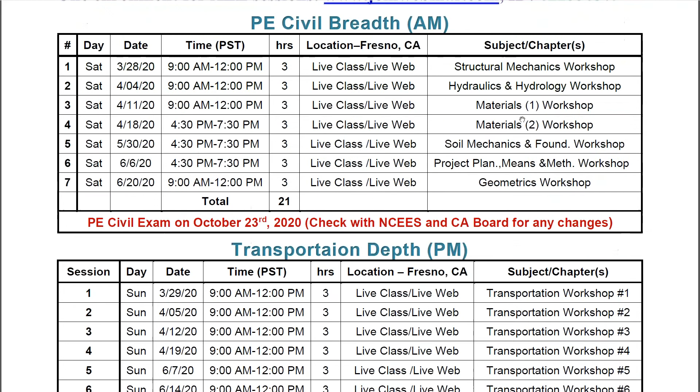Tomorrow I will be here for transportation from 9 to 12. This is also free, all of them with one ID. So one ID will be sufficient for all these sessions: the civil breadth, the transportation, and the construction.

We are going to start, or I will start teaching the courses in July. I hope the situation will be better in July and everybody stays healthy. On July 11, I will start the AM using my 3 books here, and NCEES might come up with a new book, I'm following up with that. We'll continue from where we stopped. As I mentioned, we stopped last time in chapter 7, materials, but I will go back one chapter, to geometrics, and so on, and the transportation and construction and all these things.

As far as seismic and surveying, I will start teaching. I'm teaching seismic, in fact tomorrow is the last session of the first quarter. By tomorrow I believe I have about 55 hours, or maybe even 60, because I added more sessions to catch up. I will start teaching the course again at the beginning of April, and the course will be the 55 hours. I calculated it to be about 50 hours, but I believe it's more than that. Somebody is working on putting everything on demand right now, but I will have 28 hours live, which is equivalent to a course by some other vendors, just to be a workshop, to go over problems.

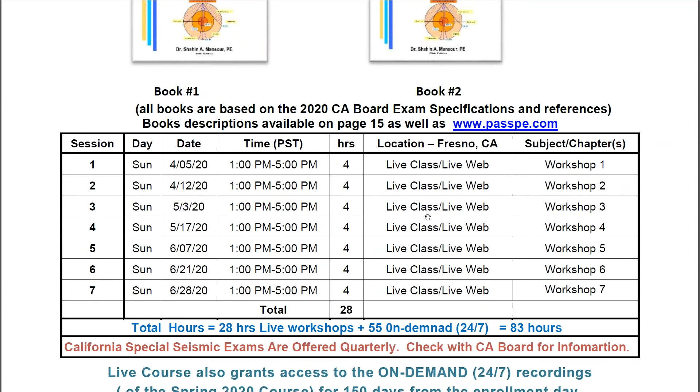I will use the 626 book. The other 2 books, the 300 and the seismic practice exams and solutions, are included here. The 626 seismic problems came from my textbook, which is based on the new code, the ASCE 7-16 and so on. This is for those who attended the first session, they will attend the second session for free, obviously, because the exams are postponed. Those who are going to join me for the first time will have access to the 55 hours. The moment you enroll, the books are in stock and we can ship it. All my books right now, I'm trying my best to have them in stock and ship the same day or next day.

Surveying also, I will be starting teaching the course on the 18th, which is April 18, a Saturday, which is in fact after the PE exam. The PE exam, as you know, used to be April 17, but it was canceled, as all of you know.

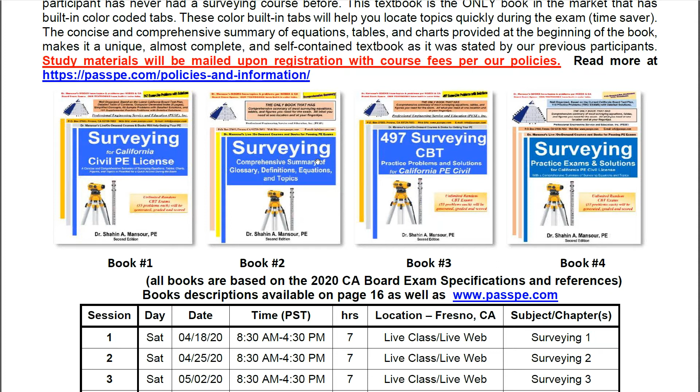So I am still working on the second edition. These books are the second edition, if I'm not mistaken, yes, the second edition here, and they have a brief description. For the second edition, I took the first edition, which I'm still using until now, the 4 books, and enhanced it and improved it and got rid of any typo or mistake if there was any. These books have been rated very high. All my books have been rated reasonably high, let me put it that way, or I'll leave it up to you, rated by the engineers who used them before on Amazon. If you go to Amazon, you will be able to see.

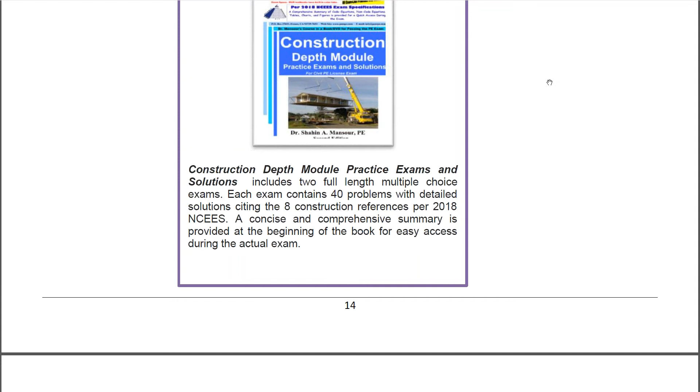Let's assume that for those scheduled to take the exam in the first quarter, you are going to take it in the second quarter, and be ready at any moment the situation allows for opening the sites again. Obviously we should be ready for it. This will be my advice. Assume that you are okay, if you're scheduled to take the exam in the first quarter.

Let us keep working hard, keep studying and going over all the questions or problems, anything you can do in order to make yourself ready, and in fact maybe make yourself not 100%, but 150% ready, so at least you can take the exam and get rid of it.

So the first quarter today is, I think, almost done. Tomorrow and after tomorrow is the first quarter, so what will happen to the second quarter? Will the Prometric site be available or not? I hope very soon, but be ready.

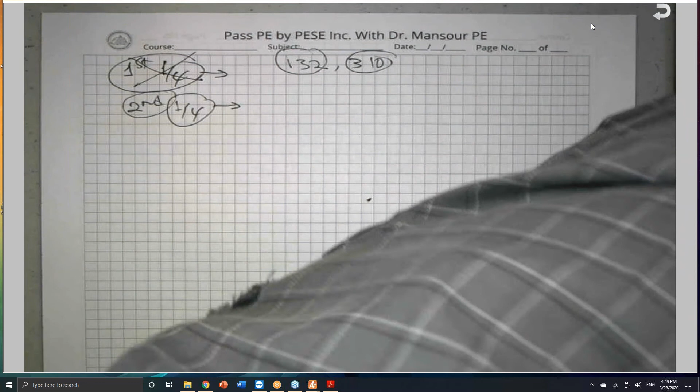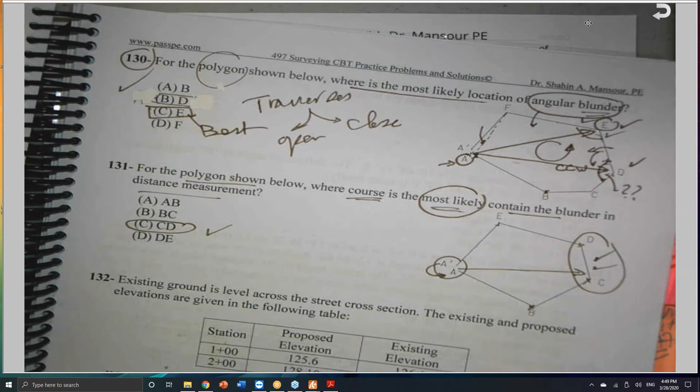Let's go to the two questions our friend asked, problem 132. Let's see problem 132 of the 497 book. Where is it? Here it is. At least if you don't have the book with you, this is problem 132. You can read it, and I will be glad to copy it, scan it, and send it to you if you don't have the book.

The existing ground is level across the street cross section. The existing and proposed elevations are given in the following table. What grading would be placed on the right curb stake for the top of curb at station 2 plus 00? This is the station here.

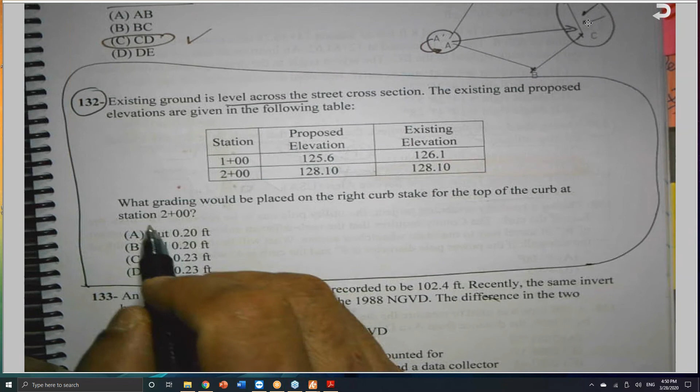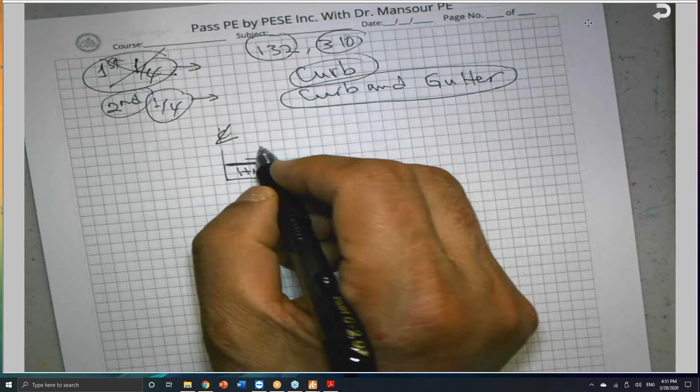As you know, a curb stake is concrete. We have curb by itself, and we have different types of curbs, and curb and gutter is another construction element. When you look at the center line of a street, we have the pavement, assuming this is AC pavement, asphalt concrete. The pavement has a cross slope of 2%. At the end here, we add either a curb by itself, which is a concrete element with a certain slope and height, and there are different types of curbs.

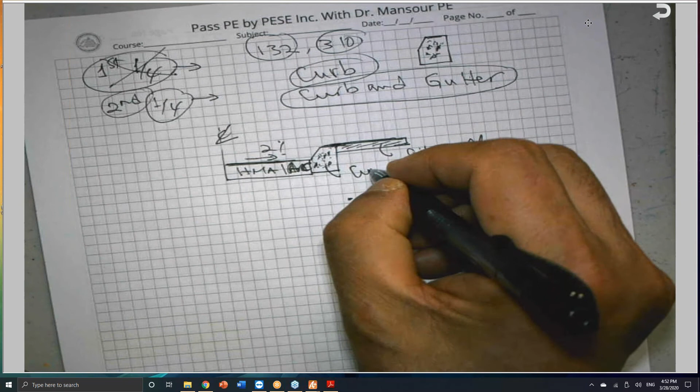So this is a concrete element here, a 6-inch curb, and the pavement. The curb is like this, I'm just exaggerating it. Here it is, and the sidewalk will be behind it. So this is a sidewalk, and this is a curb.

As I said, this is a concrete element. Normally it is cast in place at the job site. They put the forms and cast it in place. It has a certain slope, and the dimension here is about 6 inches. There are many types of curbs, and I know he will ask you about this.

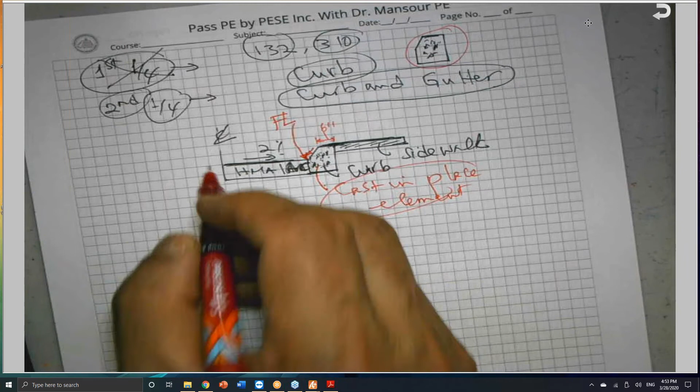This is the flow line, FL. As you know, the flow line is the lowest point where we need the water to run, across the flow line, following the profile of the road since the road extends that way. The water will run based on the grade of the road profile, which is a vertical curve, and it will be taken to a drainage inlet (DI) and stored somewhere in a basin. This is the surface runoff, SRO, called surface runoff.

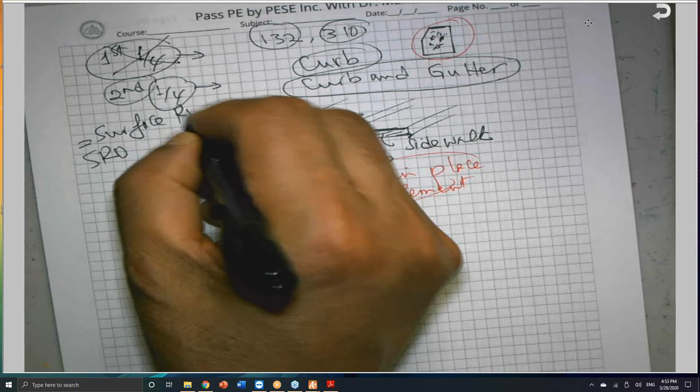Okay, this is the rain or storm, from any storm, and all of you went through the 8-hour exam, and we use this equation, Q equals CIA, the rational formula, to calculate the amount of water that will be accumulated, based on the area, the rain intensity, and C, which is a runoff coefficient, depending on the type of surface, and so on.

So the curb and gutter, this is a curb. The curb and gutter is also a concrete element, but cast in place. Let me try to draw it as accurate as I can. Or we can slope it all the way up to here. Let's make it this type, which is making more sense. The other type is very, very old.

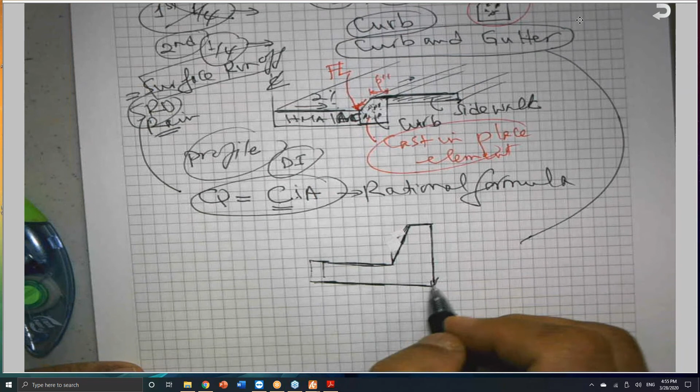So also it is sloped. Here it is, and also we put the sidewalk behind it. Sidewalk, normally concrete, and also this is about 6 inches, and this is a certain slope. And this is also the flow line, and this is also concrete, cast in place, and they probably saw it. They have some machine nowadays to do that, instead of putting the forms.

Okay, so this is also curb and gutter. This is the flow line, and this is called the lip of the gutter.

This term, by the way, in my textbook, chapter 12, which is on construction, there are some pictures or sections taken from Caltrans, the construction surveying book, or the surveying book construction section. Let me put it that way. There, here it is, it is the lip of the gutter, LIP, the lip of the gutter.

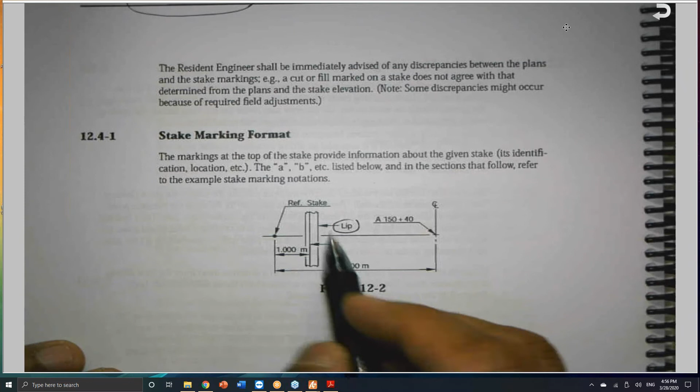So this is on page, by the way, 296. If you have my textbook, page 296. At least you know this is the top view. This is a top view, or elevation, as we call it, elevation. Top view.

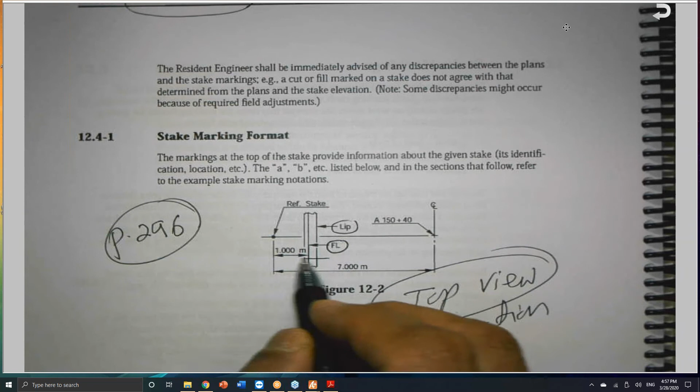So you see here it is, this is the FL, the flow line, and this is the lip of the gutter. And so if you look at the cross section here, if you'd like to draw a cross section for this, okay, like that, you will find exactly this is what I'm talking about. It is like this, and here it is, and this has some kind of slope. Okay, so this is the lip of the gutter, this is the lip, LIP, and this is the flow line, FL.

The flow line elevation. So basically, this is, if you look from the top, this is a side view, not top view. This is a side view from the side. So this is the lip of the gutter, and the pavement will come here, and the flow line and the sidewalk will be somewhere here.

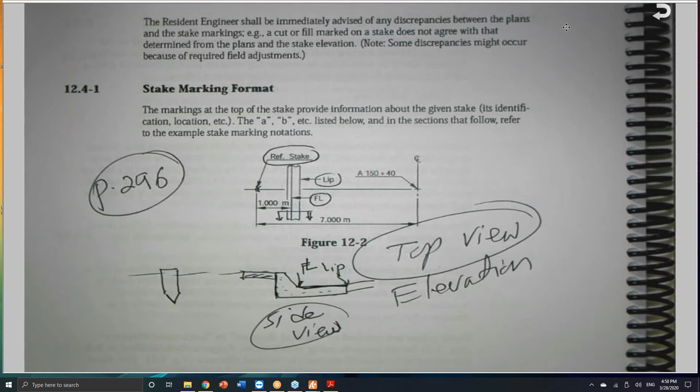So what they do, in order to construct this in the field, there is a stake, reference stake. This stake is behind, okay, we put the stake somewhere here. This is the OG, below, put the stake somewhere here. So a stake, as I mentioned before, it is a piece of wood. This stake here is the piece of wood that will be driven into the ground. And this stake is the reference stake. It's called reference stake.

And this reference stake will be used where you put the rod. I need you to understand the concept. This is why I'm going over this instead of just opening the book to the solution of the problem and that's it. No, because without understanding the problem correctly, it won't be okay. Understand the concept. So we need to be aware of that.

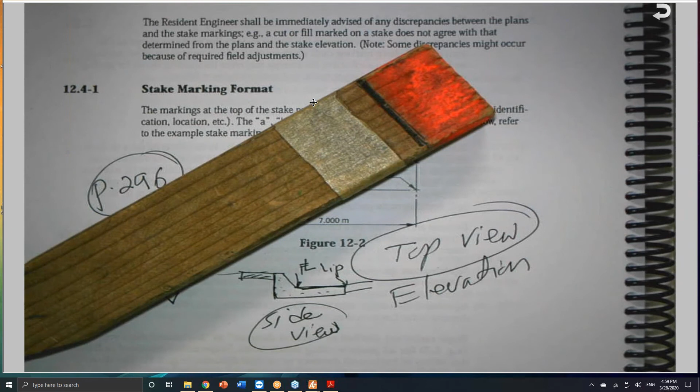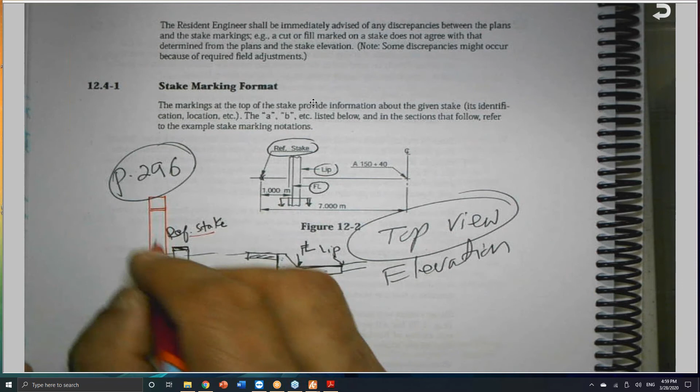So there is a stake somewhere here, and this stake we call the reference stake. Next to the reference stake, we are putting something called a witness stake, which is a long one, 4 feet. This is as you can see here, let me take the camera out here, and this is the driven stake. The stake will be driven into the ground, except we leave 1 inch on the top, and we'll color it or spray it. So when you put the rod, you put it on top of it, because I know the elevation of the top of this stake, and this is written here on the witness stake next to it. This witness stake is about 4 to 6 feet long, and we drive it next to the stake here.

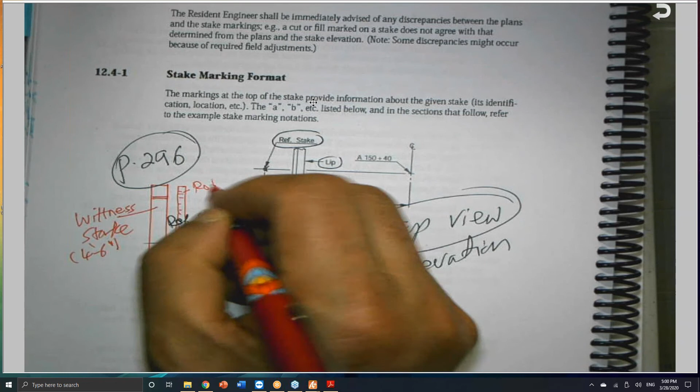I will come and put the surveying rod on top of it, the rod where all the elevations and distances are taken. This is the surveying rod. We can determine the location of the flow line, the location of the lip, the location of the end of the saddle. Any design parameter can be determined.

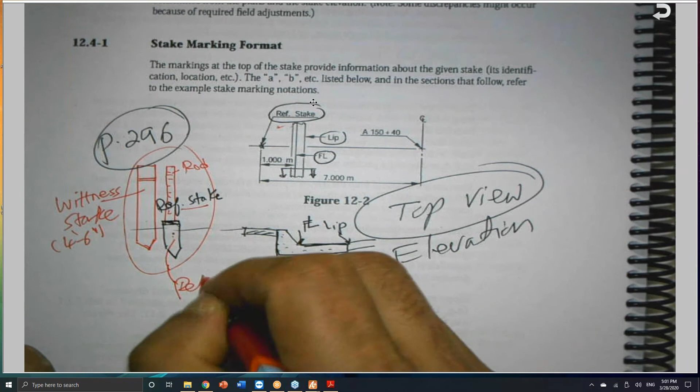What is written on the witness stake is in reference to the reference stake shown here. Normally we keep it about 2 or 3 feet away from the construction so nobody will damage it, and all the measurements will be taken from this reference stake, as we know from chapter 12, staking information.

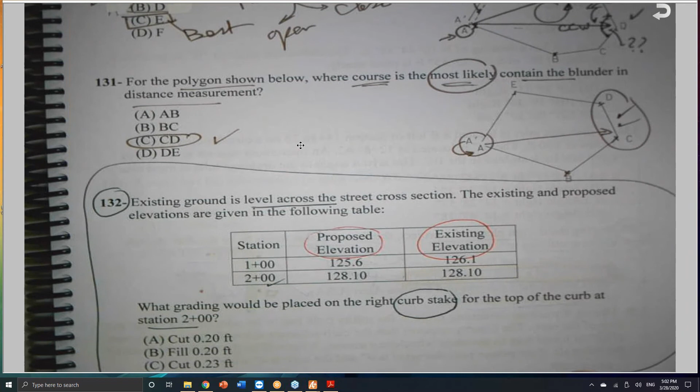So this is what is given in the problem, interesting information, and this introduction here, I hope explains what is given. The proposed elevation and the existing elevation, and the ground in the level cross section, straight. The proposed elevations are given in the following table, the curb stake and so on.

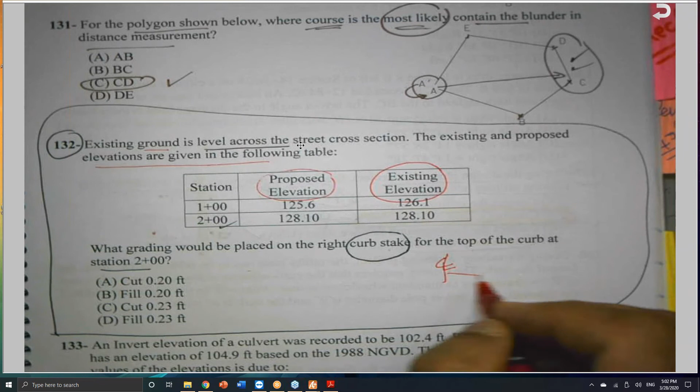There is a cross section. I believe it should be included with this problem, and probably this is what is missing, unless the text should add it here to explain what the cross section is. But if I remember correctly, this is why I draw the cross section. First, the cross section, the width of the road or the width of the lanes must be given. But let me answer one of you raising the hand, probably you have a question related to this.

What is the face of the curb? This is the face of the curb, where I draw it, here it is. This entire thing is called the face of the curb. But we normally take the flow line elevation as the controlling point. So the controlling point is, like this is a curb and gutter, this is called the face of the curb and gutter, but the flow line is the controlling one.

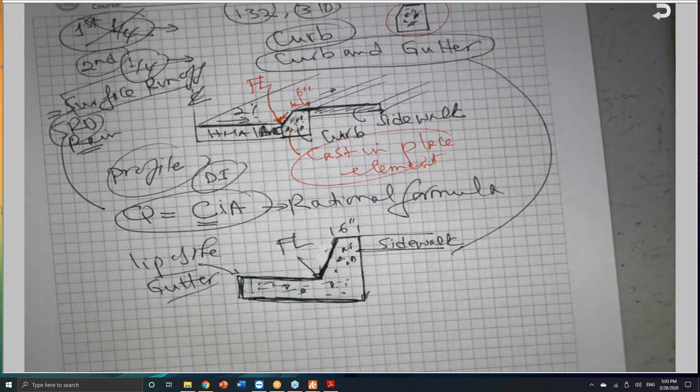So if you look at the problem, as I said, probably the cross section should be given because there is some information. Let me draw the cross section, if I remember correctly. The slope, the cross slope, normally the cross slope is 2%. However, in certain situations, we could have a different cross slope from that.

The curb here, whatever the curb size, this is the face of the curb. If you'd like to make it sloped like that or vertical, I have no problem, but for the calculation it does not make any difference. So this is a vertical curb, and this is a vertical curb, and the sidewalk will be coming after that. If you like to make it sloped like that, I have no problem.

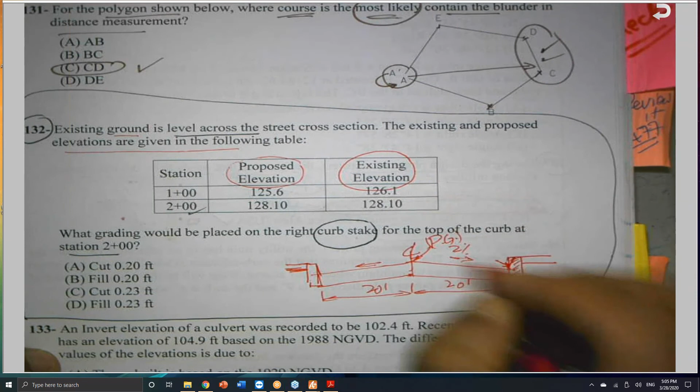I believe you are missing something here, because I look to my drawing. I have another drawing where this distance must be given to you, or the cross section, 20 feet width of the road, and this is the profile grade, the PG. Because I was reviewing this problem last week, in fact I was updating my books. I looked at this problem and said, I think we need to describe the cross section as part of the problem.

And I just opened another book. I found that this is the case. Yes, this is the case. So this 20 feet, and the cross slope normally 2%, but I believe in the problem it is given as 1%.

The proposed elevation is 128.1. This is the elevation here. No, the elevation is the elevation of the center line, sorry, which is a profile grade. So the elevation, the profile grade, the PG, this elevation must be given as 128.1, either given to you directly or given to you in a form of a vertical curve.

So this cross section has to go with it, 128. So 128, I can get the elevation here. So the elevation of the flow line, which is the face of the curb, so the elevation of the flow line, okay.

What grading would be placed at the right curb stake for the top of the curb at station 2? Okay, so right now I have 128.10. So it is here, and since this slope here is 1% at 20 feet, it is minus 20 feet times 1%.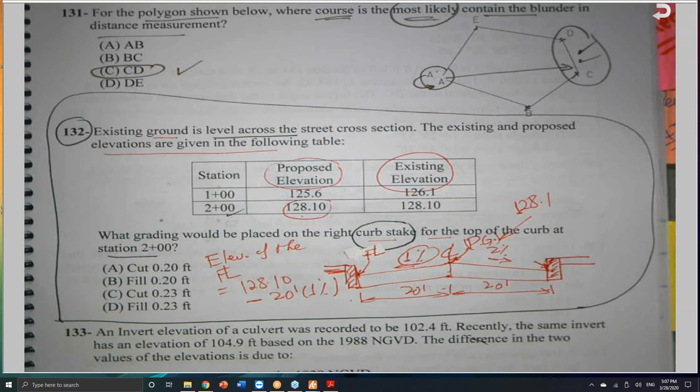As I told you, this cross slope must be given either 1% or 2%. For this specific problem, the cross section, so this elevation is 127.9 feet at this point here. So this is the elevation here. The existing elevation at this station is also 128.1.

This is lower than this. So right now, do I have cut or fill? Since this is my finished elevation, and this is the existing elevation, so the existing elevation of the OG is here. Sorry, it's 128.10, and I know they are the same.

This is why I said, wait a second. The finished elevation is here at the face of the curb. The finished elevation, which is at the flow line, this elevation is 127.9 feet. So I am below the original ground. That means that I have cut.

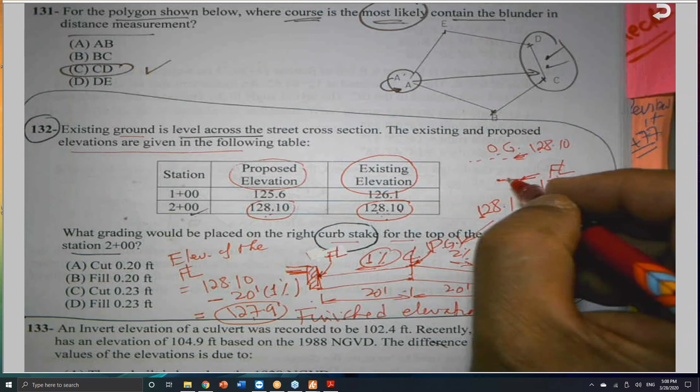Because as you know, when we have the OG, the original ground, this OG here, normally we request this by sending a survey request, and somebody will go and survey the original ground, which we call the terrain, or we call it DTM, Digital Terrain Model, which is basically the elevations of the existing ground. Our profile will determine if we are in cut or fill.

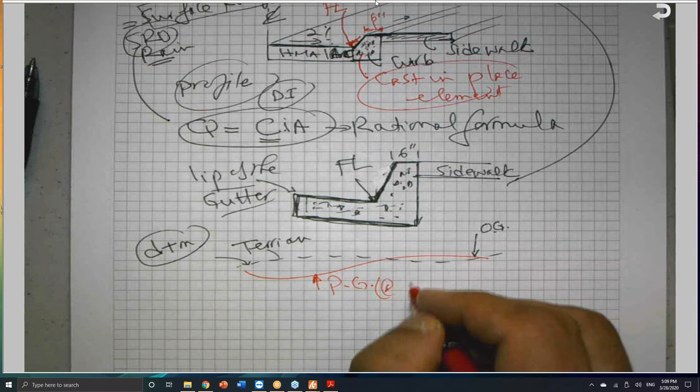So if this is my profile grade here, this is a profile grade which is PG. This is for the center line, and this is applicable to any situation. Normally the PG is at the center line, the profile grade. For any given street or road, we prefer the center line to be the profile grade, but sometimes we have a separate two profile grades. We have some roads with two separate ones, one higher than the other, so each one has its own profile grade.

So in this case, since we are OG above this one here, we have cut, and here we have fill. This is the rule, as all of you know: if we are higher than the OG, we are in fill; if we are below, we are in cut.

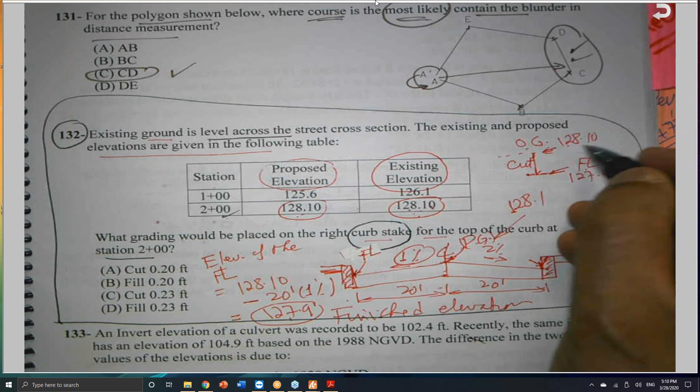Going back to this problem, you will find that the OG is 128.1, and the finished grade, or the face of the curb, or the flow line elevation, gives a difference - this is a cut. If we take the difference between 128.1 minus 127.9 feet, this gives you 0.2, two tenths of a foot of cut, and this is supposed to be the answer. Here we have repeated answers, 0.2 cut and 0.2 fill.

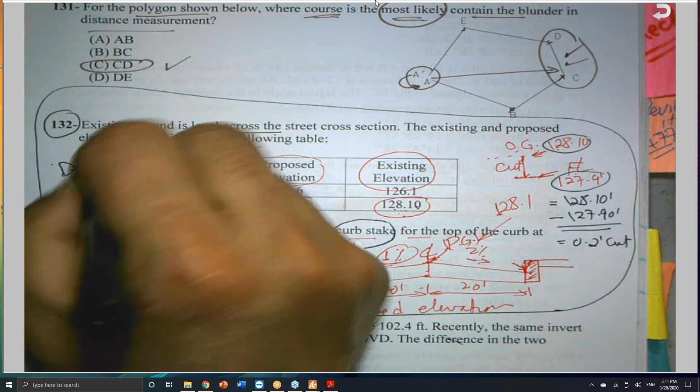So in this case, probably this is what throws you off, that the cross section or the description of the problem - we could describe this, as I told you. So describe the problem as far as the cross section, because it's missing. To be fair, the problem should describe the problem, or give a cross section. Because after I read it, I went to another book because I have a similar problem, and I found that the cross section must be given to you.

So this is what I will add or modify as far as describing the cross section: it's a 20 foot cross section, or 40 foot road width. We normally assume the center line in the middle, so 20 feet at a cross slope of 1% or 2%, and the problem could specify the station, so specifically at station 2.

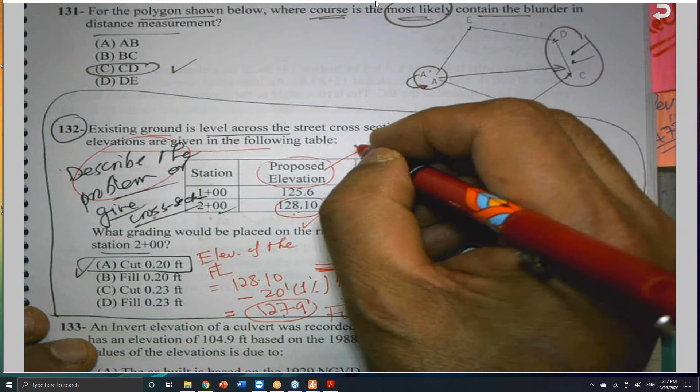So this is what we are comparing, the existing with the proposed, or the proposed elevation with the existing. Normally the proposed elevation is at the center line, because that is the profile grade where all the elevations will be measured with respect to that.

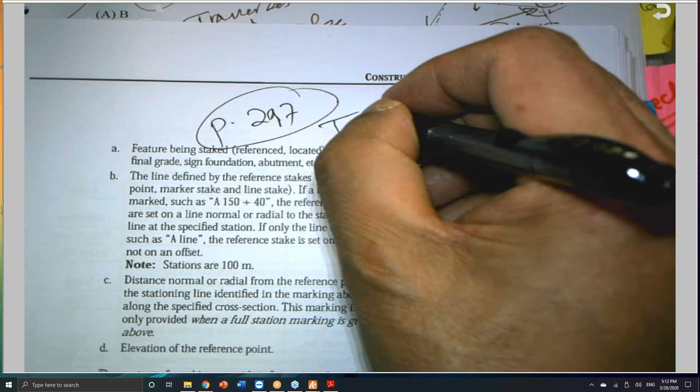Okay, so this is something that will probably throw you off a little bit. But if you look at the construction book, construction chapter 12, you will find something similar to this. This is a stake. If you flip the page, you will find on page 297 of my textbook an explanation of the stake cut, flow line, the lip of the curb, and so on. So it gives you insight about how to translate any given statement into some kind of drawing or illustration. So this is one thing.

Okay, so this is 132. So I wrote a note here to myself. Let me put a tab here. At least I can.

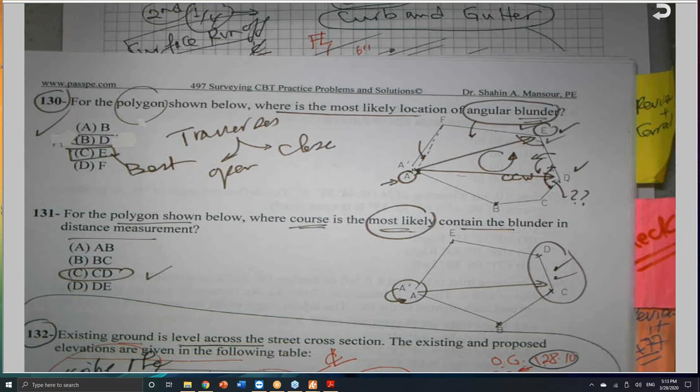Okay, the second problem you are requesting is 310. Let us see 310. I hope 310 is not missing anything. 310. Okay, here it is, 310.

So 310 is, again, this is a cross section at station 12 plus 00. And the cross section here, this is OG, original ground. Normally OG here it is shaded, so probably OG normally it is shown as a dotted line or a dashed line. It would be a good idea, but since it is shown as shaded, sometimes we use this. And it is asking what is the area of the fill.

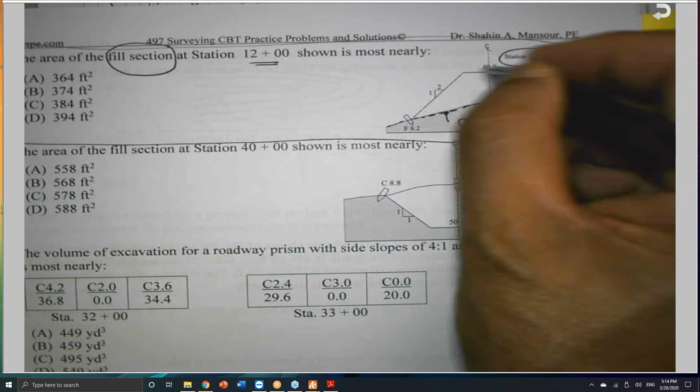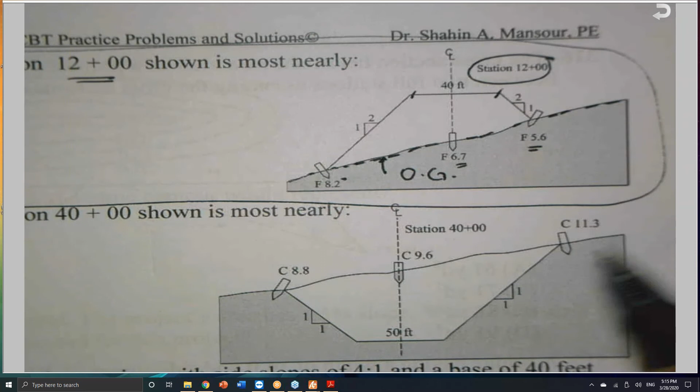So the proposed cross section is like this. It is 40 feet wide, and this is the center line. And we have some stake information. Let me zoom in so you can look at the cross section much better. Okay, so this is a road, it's 40 feet wide, and we have 2 to 1, 2 horizontal 1 vertical, 2 horizontal 1 vertical, and this is the OG. So for sure we do have a fill.

And he is asking what is the area of the fill area. The area of the fill is needed in order to calculate the volume, because if we do have a road like this, this is in a fill. So in this case, we need to get the area here, if this is the OG like that, and I am building a facility like this. So I have a fill area here.

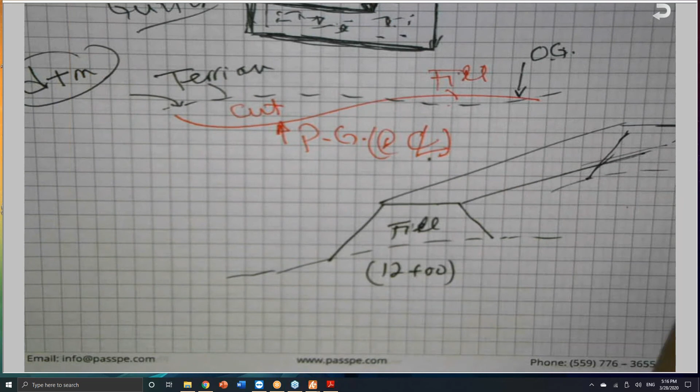This is station 12 plus 00. And probably at another station, okay, somewhere here, so this probably station 13 plus 00, a 100-foot station here. So the cross section here and the cross section here, A1, for example, and A2...

...will help me, or will enable me, to do the volume computation using the average end area method. As all of you know, volume using the average end area is basically A1 plus A2 divided by 2 times L, and we divide by 27 to convert it to cubic yards. But the basic equation is A1 plus A2 divided by 2 times L. This is the basic equation that we use for the average end area method to get the volume.

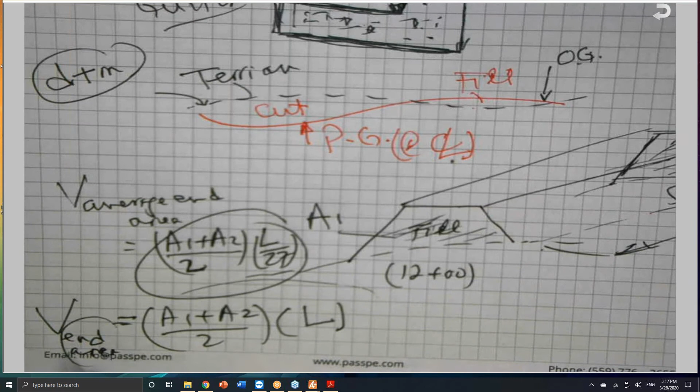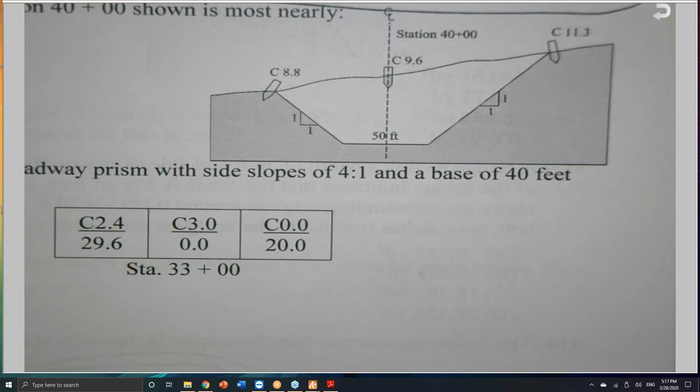So the first step in volume computations is to find the areas. And this is what, as a first step, is to calculate the area of the fill. Immediately the following problem is the area of cut. In fact, this is a cut, indicated by the letter C. Here the letter F is indicating that. So again this is the OG.

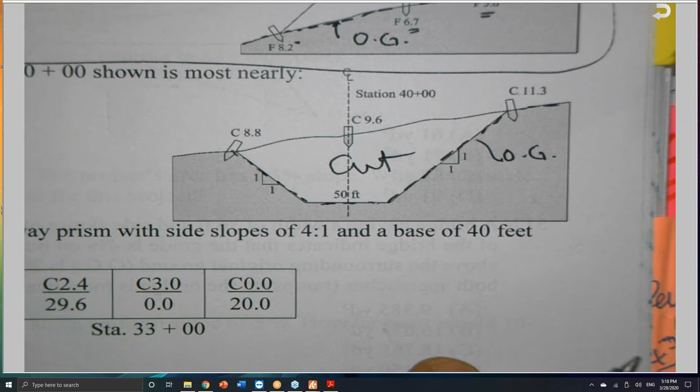Again, normally the OG is a dotted line, or since we are showing it as a shaded area, it is acceptable to do that. So they are giving you the cut, how much cut with respect to the profile grade. This is the profile grade, by the way, PG, a profile grade, which is normally at the center line of the road. Like this one here, also the profile grade is somewhere here, PG.

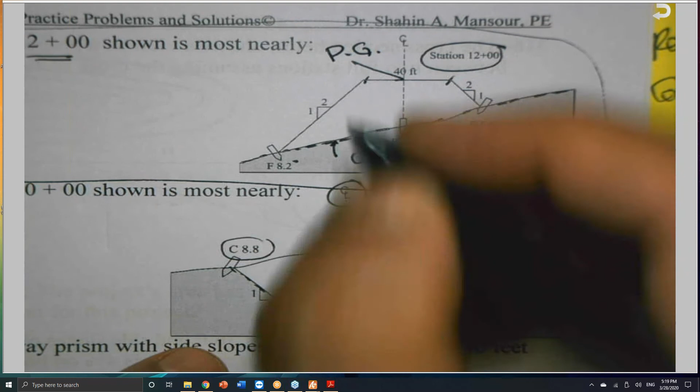So to calculate the area, either in case of a fill section like this or a cut area like this, we need to remember the area computation - let me just bring you up to speed here. So the area calculations, there are more than one way to do it, to calculate the area. Number one, which I normally recommend, is to look at how this area can be broken down into simple shapes or divided into simple shapes. This will be my first choice.

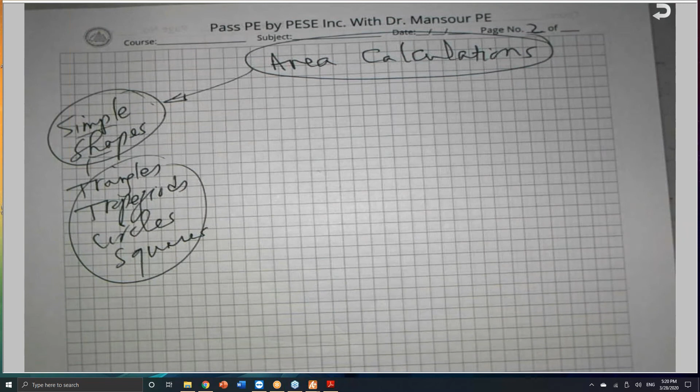Like the problem we are going to solve here, I will break it into simple shapes: triangles, trapezoids, circles, squares, whatever shapes you can generate. This is almost my preference, and I always recommend that first.

Some problems give you the shape or the area you are required to calculate, and he's giving you coordinates. So we use coordinates.

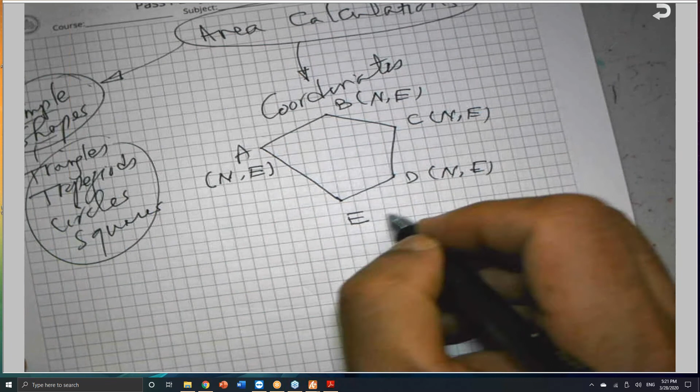He gave you a parcel like this: A, B, C, D, E. But he gave you the coordinates, the northern and the eastern, or X and Y, at each corner. The moment I see coordinates given at each corner of this parcel, and he's asking what is the area, that means he is asking you to calculate the area using coordinates, as I discussed in chapter 8 of my textbook. It's a very powerful method, by the way.

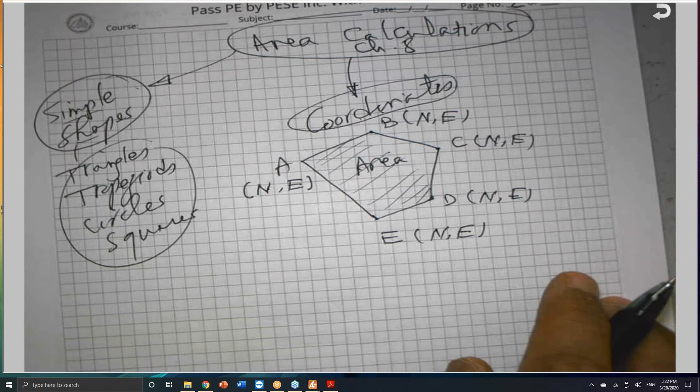But we need to remember that using coordinates will give you twice the area. Double the area. You have to divide by 2, because among the answers, I'm expecting that he will give you an answer that matches twice the area. I can come up with some kind of problem right now, or go over some problems given in my book.

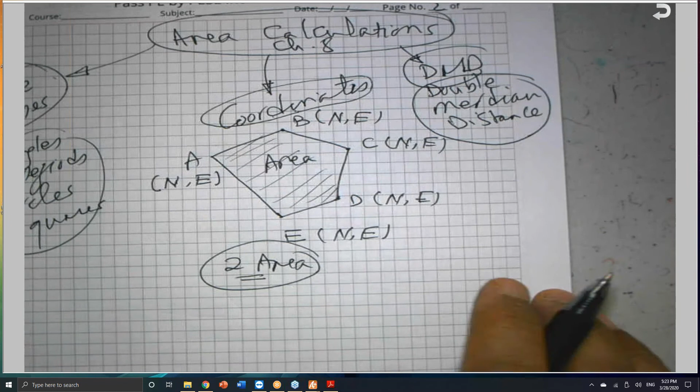There is another method also discussed in chapter 8, called DMD, double meridian distance method. It is very lengthy because you have to get the DMD first, and after that multiply it by the latitude. It's a very lengthy process, and this also gives you twice the area, but he might give you something already calculated - the double meridian distances in a table form and ask what is the area. But to generate everything from scratch will take more than 3 minutes.

But with coordinates, you should expect something like this in the exam, where a shape can be given like this.

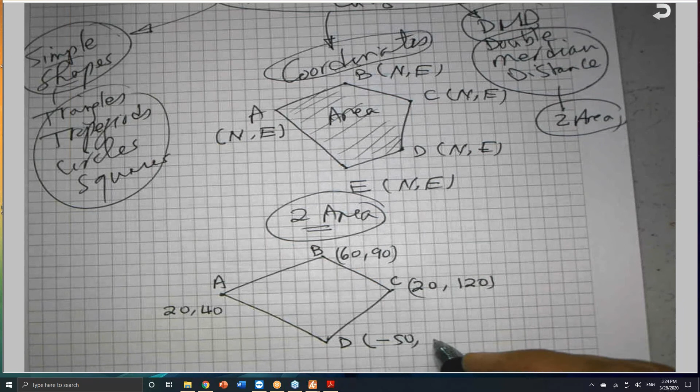For example, if this is A, it is 20 and 40. This is 60 and 90, assuming that, and this is 20 and 120, and let's assume this is negative 50 and 85. Let's assume this is given to you - I made the problem based on my own example, with coordinates, northern and eastern, given for each corner, and here I put one minus specifically. What is the area of this parcel, or this shape, or parcel of land?

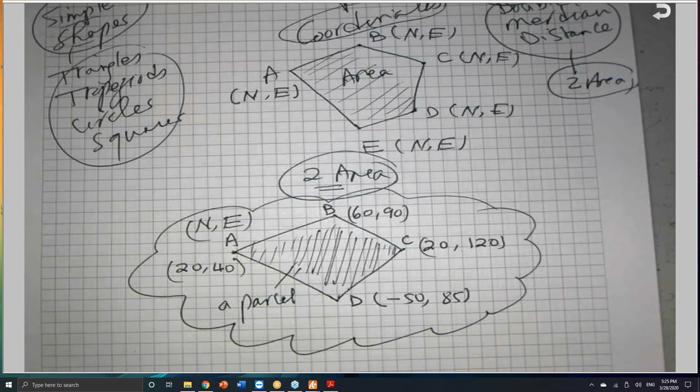As you recall, using coordinates, the way we do it is we put these coordinates horizontally or vertically. Coordinates, by the way, have another name - it's called the crisscross method.

So if you look at this, you will find that I need to put the coordinates. I start with A, and as long as you start with the same order, northern, eastern, there's no problem. So it is 20, 40. The second one is 60, 90. These are the northern coordinates, and this is the eastern coordinates. And 20, 120, minus 50, 85. If you have coordinates with a negative sign, you have to enter it with the negative sign.

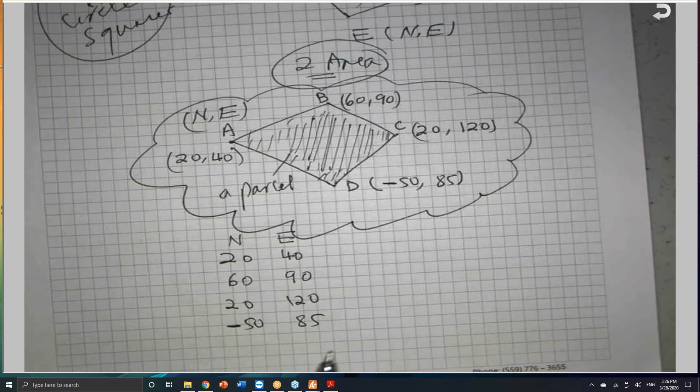It's something that happened before, and it was very confusing to some engineers, because as we are going to see in the process of computing the area using coordinates, we have a plus side and a minus side. But you enter the coordinates as given.

One requirement for the coordinates method, or the crisscross method, is to repeat the first coordinate. So I start with 20, 40, and I list all four corners, and I have to end it with 20, 40. This must be repeated - this is a requirement for the coordinates method, repeating the coordinates of the first point. You have to do that; if you didn't, you'll get an error. After that, we do the following.

You multiply this times this, and this times this, and this times this, and this times this. As you can see here, we have 4 sides - 1, 2, 3, 4 - so you have 4 multiplications, and we'll consider this a plus.

And I will do it in front of you right now. You are going to take the opposite direction, which is a minus. This is 20 here, just to make sure. This is the minus side, and it does not make any difference which one is plus, which one is minus. It's not a big deal, because we take the absolute value of the area at the end, since the area cannot be negative.

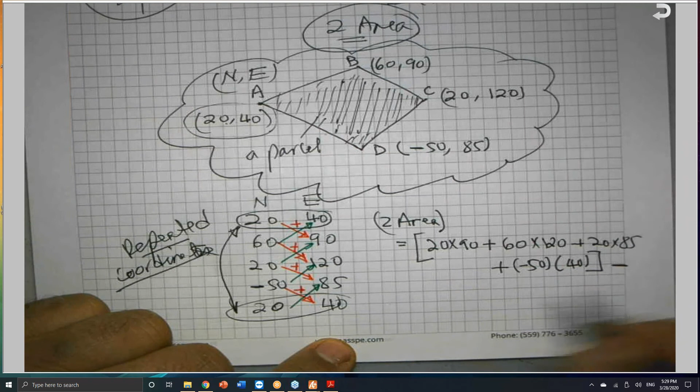All these are pluses, but because I have one coordinate that is negative, I put it as is. I will subtract this, minus the green. So those are the red multiplications. I should use the red. Minus the green multiplications.

Don't forget this minus here. Minus 20 times 85, minus 50 times 120 - sorry, a plus, because I put the minus here, I factor the minus outside, so minus all these. And 20 times 90, and finally a plus 60 times 40.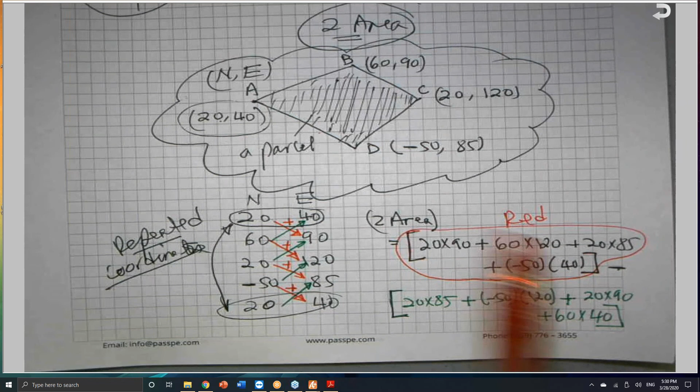So this is the way we do it. I will collect all the terms in the red, and I collect all the terms in the green, and take the difference between them. This will give me twice the area. The area is equal to 1/2 of that.

So if you allow me to do this very quick, you can help me by doing this with me, please. 20 times 90, plus 60 times 120, plus 20 times 85, plus minus 50 times 40. I got here all the red areas, 8700.

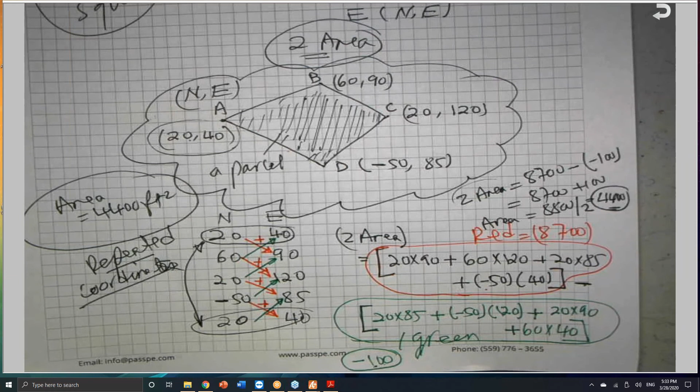The reason I'm doing this problem is because I'm going back to the original question that was asked by our friend Larry, asking what is this here - the area here.

Let me just draw it very quick, at least when you receive my notes it will make more sense. I'll make a copy of this page also to send to you for those of you who do not have the book. So this is the OG, and here is the center line.

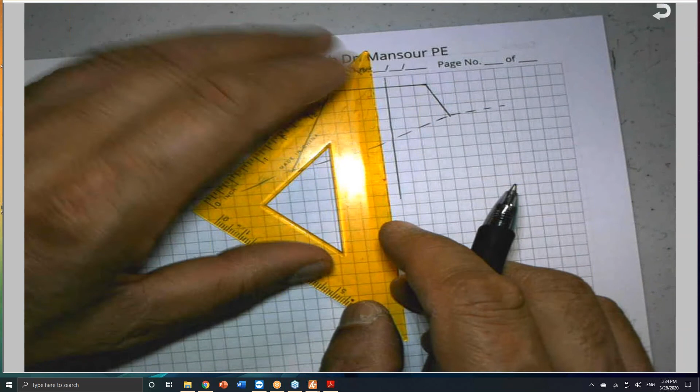And I have a road, and I have a fill, and I have a fill at such slopes. Oops, I didn't put my center line in the center. Let me move it a little bit - at least it will make more sense to you. Sorry, I didn't.

Okay, should be in the middle here. It seems that. Okay.

So this is the center line, and we call this the profile grade, PG. He said that this is 40 feet, that means 20 feet here and 20 feet here. Normally the center line is in the middle, okay? And this, we call it HP, hinge point. And this is also, we call it HP, hinge point.

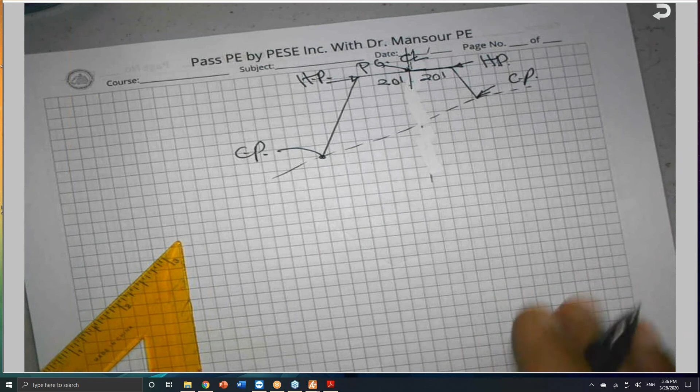And we call this point here catch point, CP. And we call this also CP, catch point. All these abbreviations that we use, I hope you are familiar with. If not, I have a very good list in chapter 12 of my textbook, or at the beginning of the book, a complete list of abbreviations.

He gave you the side slopes. He said that it is 2 to 1. 2 horizontal, 1 vertical, 2 horizontal, 1 vertical.

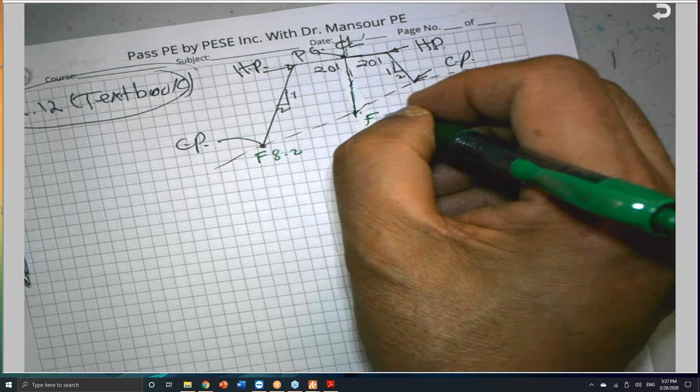And he gave you some key. He said that this is a stake here and there's a fill, indicating this fill 8.2. And this is a fill along the center line here. The fill along the center line, or at the center line, I have a fill F of 6.7, and I have a fill at this catch point here, fill of 5.6.

And this is what is indicated in the problem statement itself, as you can see here. Okay, so knowing that, here we go. Knowing that, now we can start to work.

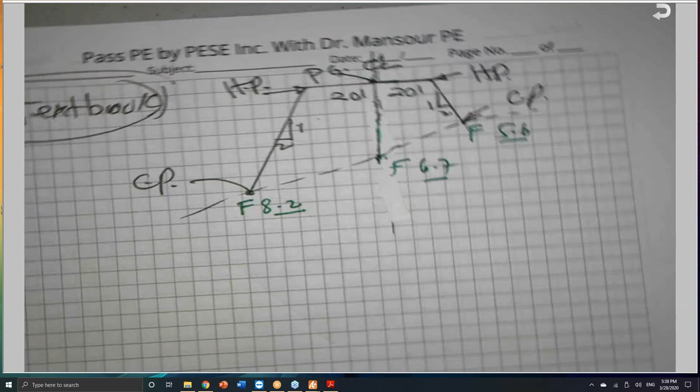So I need to find the area. As I told you, there are three methods: simple shapes, number two, coordinates, or the crisscross as we call it. And there is another method I will mention, by the way, because you might be asked about that, the DMD. Or let me add the fourth one right now, which is area from a reference line.

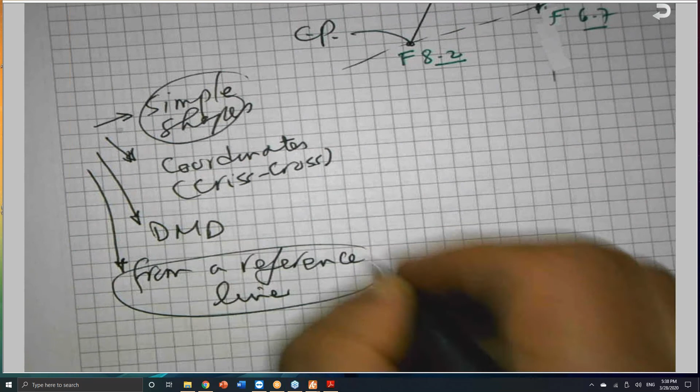You will see it. So from a reference line, I will talk about this or show you in my book how, because I think also this could be a target for a question. Could be.

But let's finish this. So if you look at the four options I have here for this given problem, you will find that coordinates, yes, you can do that. You can establish your coordinate here and go around by some key points. But again, you have to establish your coordinate system, and you can select any point, by the way, to be your reference for your coordinate system.

So can I use the coordinate system or the coordinates method to solve this problem? The answer is yes, but it will take time. DMD, forget it, you need about half an hour. And you have to establish bearing and distance and all these things, it's too much. A reference line is not applicable in this case. So normally, as I told you, this is why I always rank this to be my first choice.

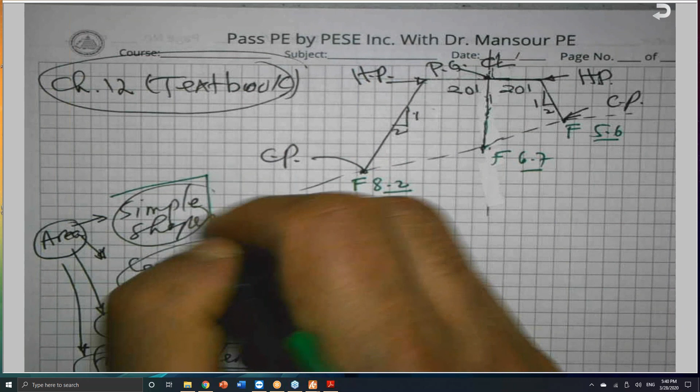Unless you can, by the way, solve this problem also using coordinates, using also the simple shapes. You can break it down to simple shapes like that. Break it down to simple shapes and see A1 plus A2 plus A3 plus A4, but you have to be careful with coordinates. But I prefer to use this directly. The moment I see coordinates given in the problem statement, that means he is directing me to use the coordinates. And as I said, don't forget to repeat the first two coordinates of the first point. You start from here, you go around. Normally we prefer clockwise.

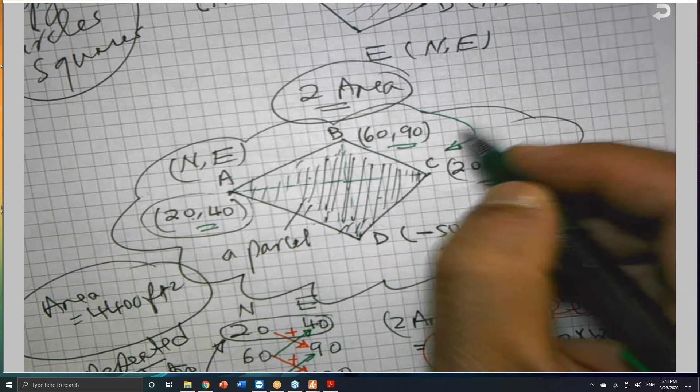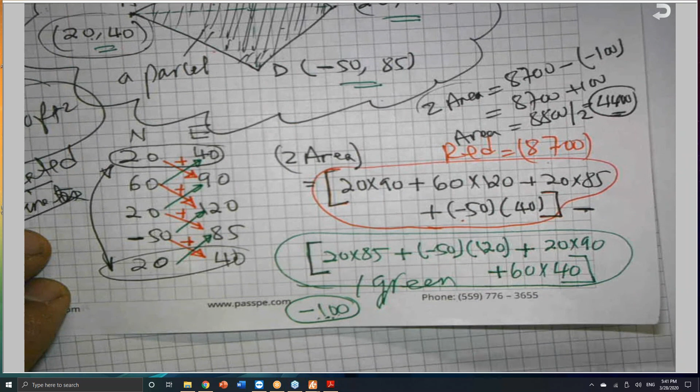And the area, if you ended with a negative, for example, if the numbers—and we have some numbers, this red 8,700 and the green negative 100—maybe this is 8,700 plus, maybe this is 9,000 negative, I take the difference between them. Okay, so be careful about that. I take the absolute value because area cannot be negative, even if the negative area is more than the positive areas. So in this case, I take the difference between them based on this sign here. Okay, so I need to be aware of that.

Okay, I am getting close, my friend. I know some of you want to raise a hand, but normally sometimes I wait until I finish my concept, and after that, in this case, we can work the problem.

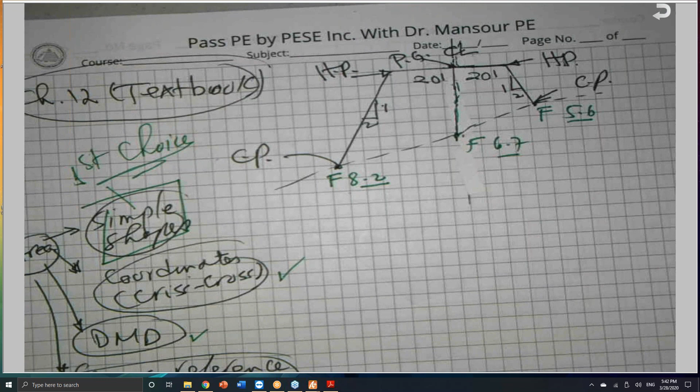And the easiest way, as I told you, simple shapes. So in this case, I can break it down to triangles and trapezoids. Sometimes we complete the area to be like this and subtract. For example, I can complete it like that, like 2 trapezoids.